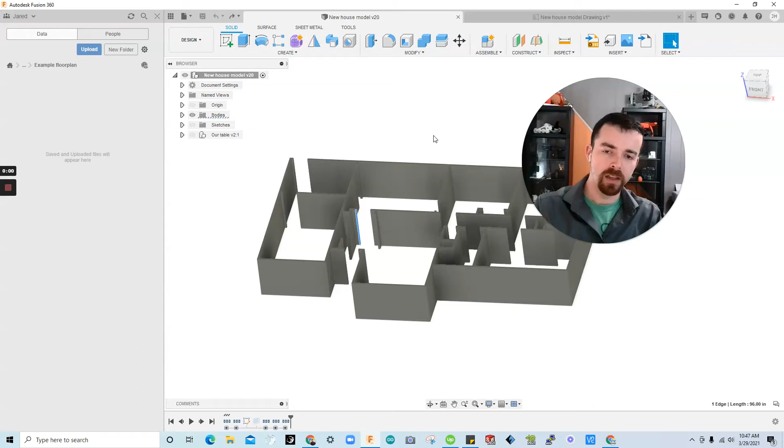Alright, good evening everyone. This video is simply to show you how to turn a hand sketch like this into a physical 3D model or 3D print.

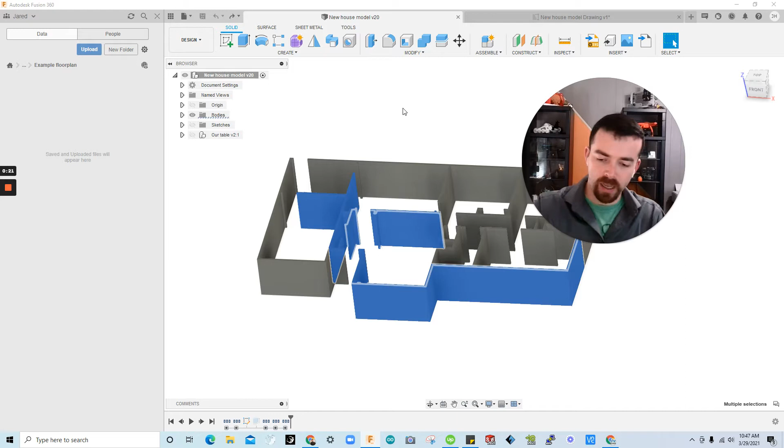Or if you want to just leave it on the computer, you can have the 3D model there, or throw it into a floor plan. I'm not going to do any advanced stuff, just the very simple stuff using only free software, and just beginner level walls, doors, and windows.

I'm going to go through this video in this order: how to produce a basic model drawing packet from a floor plan for free, and I'll show you where to get this software. Simple setup from sketch, then extrude basic walls and windows, export it to a drawing packet, and then I'll show you some additional options for sharing our plans with friends for free — appearances where you can paint the walls, add furniture and decor.

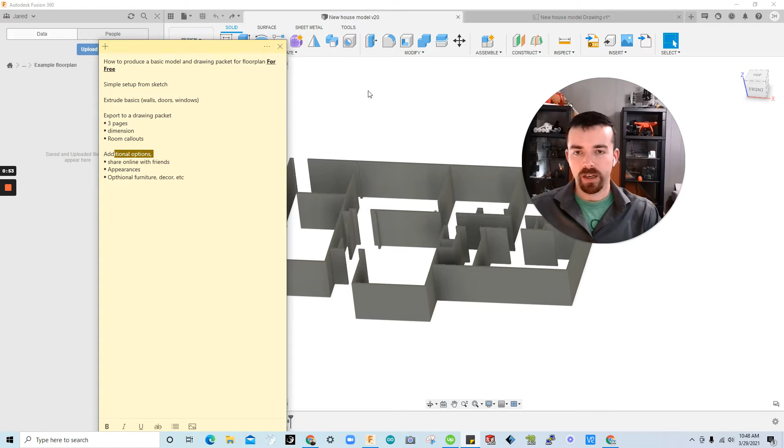So that's enough of that, let's jump into it. What I've done here is taken a picture of this simple hand sketch. I just threw this together in like a minute right before this video.

So we're going to get Fusion 360. If you don't have Fusion 360, it's free, don't worry. I'll show you where you can find that at autodesk.com/products/fusion-360/personal. Or just go to Google and type in Fusion 360 for personal use, scroll down, click Get Started, and run through those steps.

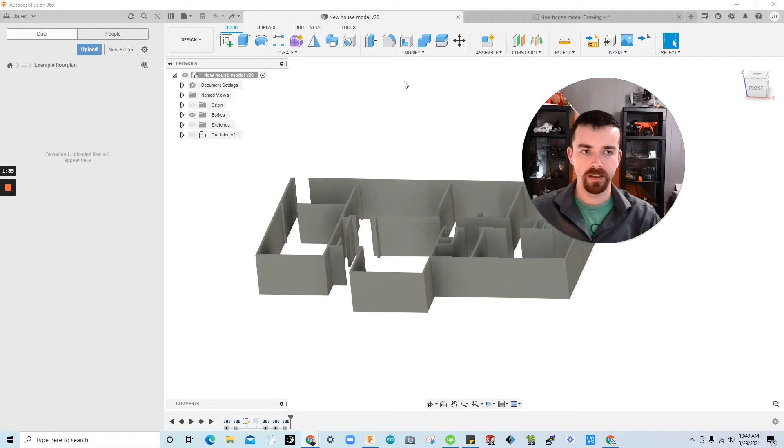Once you have that, you'll open it up and it'll look like this. We're going to start a new project — that's just a different one I was working on.

You'll need to take a picture with your iPhone or whatever and put a picture of this on your computer, because this is literally the simplest way I know how to do this.

So we'll go to Insert. Let me move this out of the way. We'll go to Insert here, go to Canvas, click Canvas, insert from my computer, find your image, and open it.

Sorry, my cat just jumped on the desk. Let me get him off.

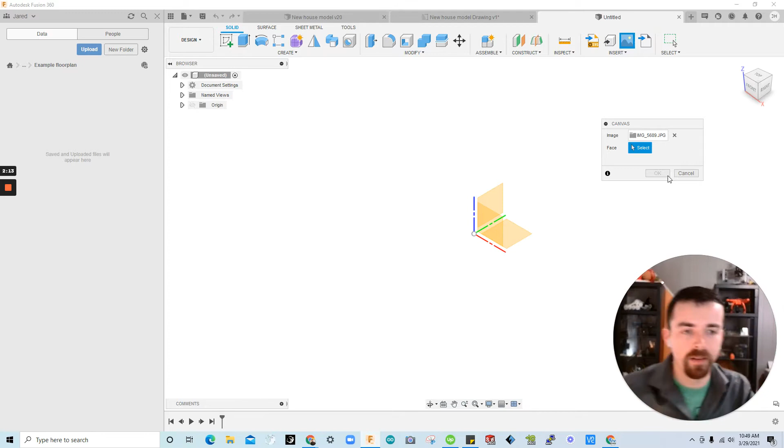Sorry, buddy. We're going to click on any of these faces, that'll be fine — our plane has the face here, so I'm going to click that. It'll ask me if I want to scale and whatnot, but let's keep this very simple, so on the confusing one, just click OK.

You can use the view cube to zoom in and zoom around, and also your scroll on your mouse, but I have a 3D mouse, so I'm going to move it around like this, just a heads up of why that looks different.

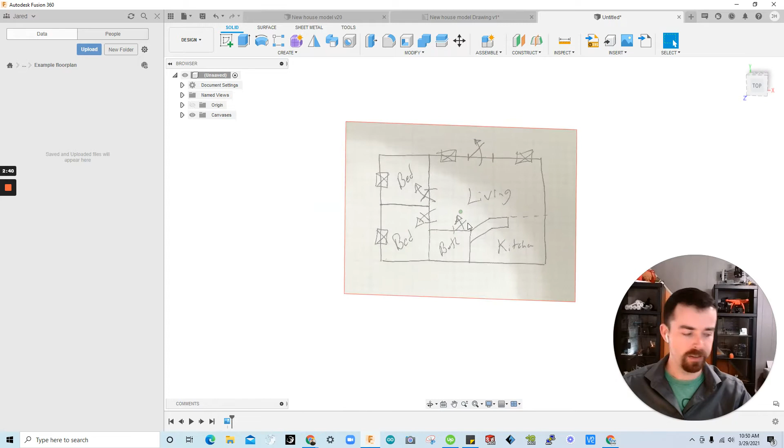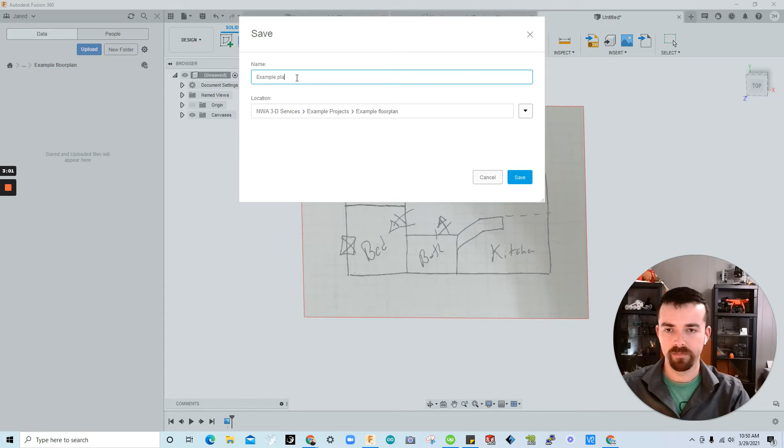So we're looking at the canvas here. You can see now we also have a canvas here, but we have unsaved, or we haven't saved our document, so I'm going to push Control S and name it example plan or floor plan — doesn't matter if it has a space in it, that doesn't matter.

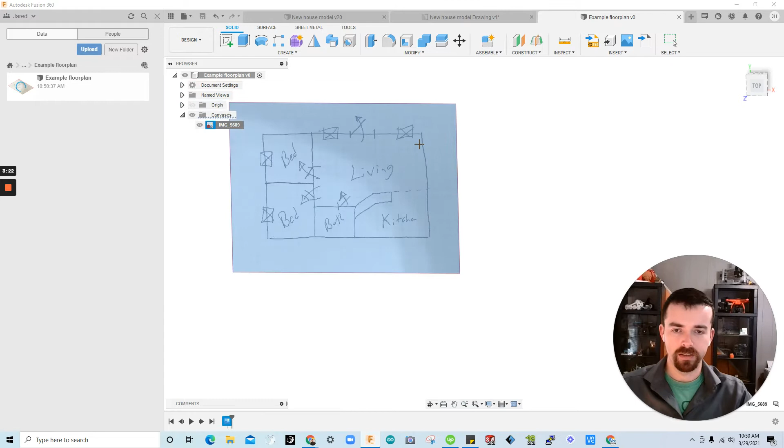Expand your canvas here, and then once you find the image, right click on that and scroll down to Calibrate. Once you've got Calibrate, go to the canvas and click between 2 points you know the distance of.

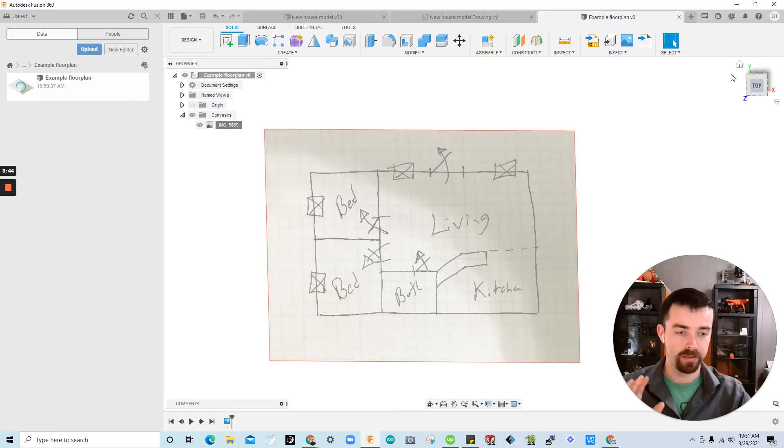And again, this is a hypothetical floor plan I just drew up real quick, so I'm going to say that is 40 feet. Click Enter. You're going to need to scroll way out, because as you see we just made that thing huge, and if it disappears, just click Home and it'll auto zoom you in.

So this will be relatively accurate. Now let's produce a 3D model — that's the first step, because then we'll have the model to drag into a drawing, and it's very simple.

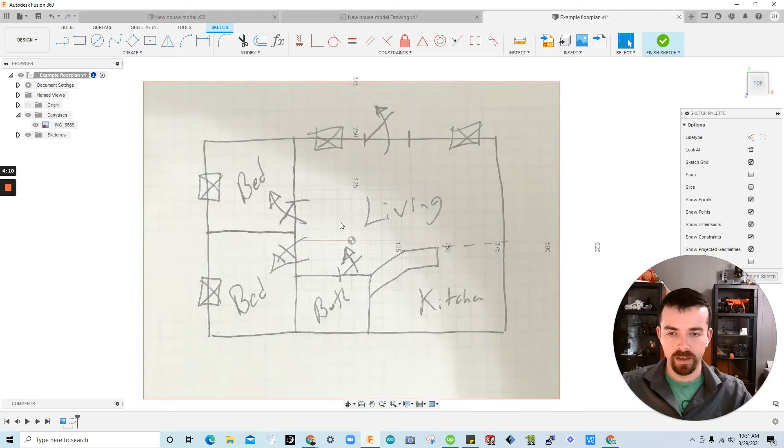So the first thing you'll need to do is click Create Sketch, click on the face there, that's the same one the canvas is on, and we're going to click on 2-point rectangle. Click on 2 corners of the house, and again, if you have multiple shapes, don't worry, we're just going to do a very basic version right now.

So rectangle — I'm not adding in dimensions at this point because this is a very simple video. I'm going to click Offset, click that rectangle, and you can see it's going to ask me for a dimension, and this will be our wall thickness.

And don't let this part lose you, because you don't need to do this, but it will save you a lot of headache. Go to Modify, Change Parameters, and then add these parameters in. These are the most basic ones, so use parameters, plus icon.

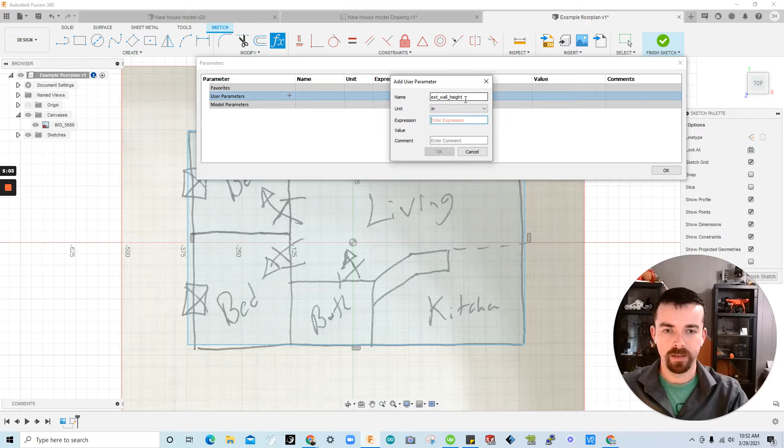We're going to call this one EXT for exterior wall height. Tab, tab — I'm going to say they are 8 feet tall. Tab, okay, add another one for interior wall height.

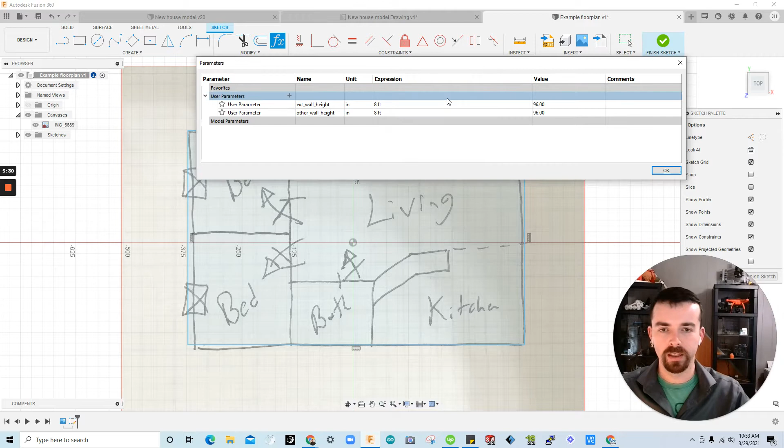Actually, you don't want to start something with IN because of inches. So let's start with other wall height as a parameter - tab, tab - and I'll make those 8 foot as well for simplicity. But the big one that'll save you a lot of energy is doors, windows, and walls. So let's do wall thickness, tab, tab, and I'll say they're all 4 inches.

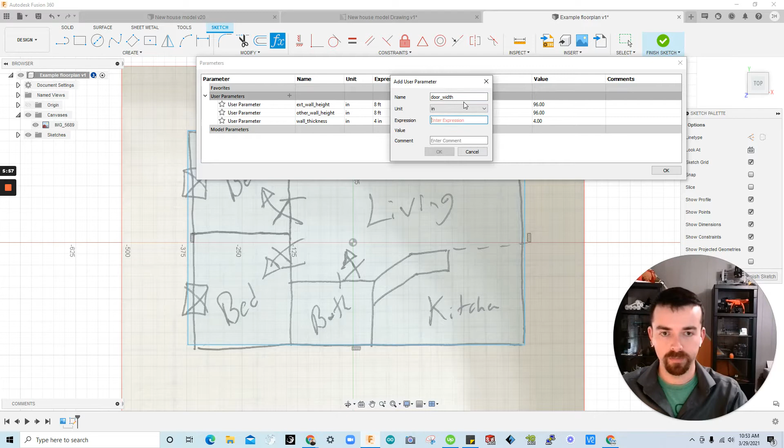Create another one - don't let this lose you. For door underscore D width, tab, I'll say they're all 36 inches. I clicked enter there twice because I didn't add anything for windows, but that'll be fine.

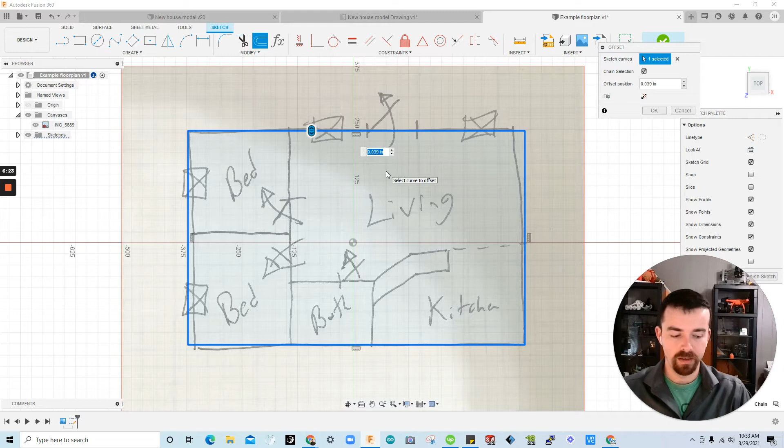Let's jump in - here's where that is very useful. If you click offset, or type O, I could click this rectangle. Now in the dimension here, I'm just going to type 4 inches, or IN, enter. You don't have to call out your units every time if your document settings have the right unit there. If not, adjust that to inches, which I'll show you. If they're in millimeters, meters, whatever, just click inch.

And mine are already at inches, so it's not letting me change. So that's where we're going to save a lot of time. Instead of saying 4 inches, we'll say wall, and you can see wall thickness popped up - that's our parameter that we just programmed. So enter, wall thickness, enter. Anytime in the future, I don't have to go back into the sketch to change that dimension, and we don't have to do it for all the walls, or keep adjusting them all.

We've got our exterior wall done. Now let's do our interior walls. I'm going to zoom in. You can see I'm just tracing the drawing, which is not very precise because I'm locking that line vertically, and you can see it's perpendicular.

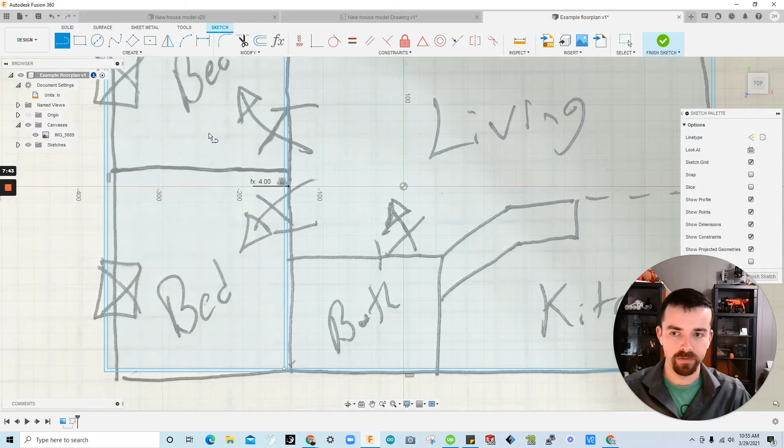I'm going to click O, or type O, or click offset there, and then wall thickness - you can see how that becomes very convenient. I'm going to type L for line, and just line this up about right there. That's fine.

Type O again for offset, and type wall thickness. Again, offset is up here and line is up there. But when I say type letter, it's a shortcut key.

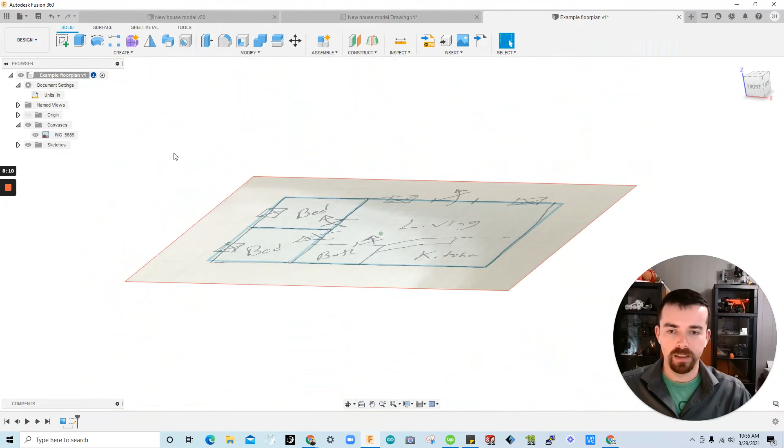All right, now we have the basics of what we need. I'll go ahead and show you what that would look like. If I zoom out, I'll turn my canvas off so you can't see it. Our goal here is just to extrude these out, clicking the spaces, and now we'd have a model.

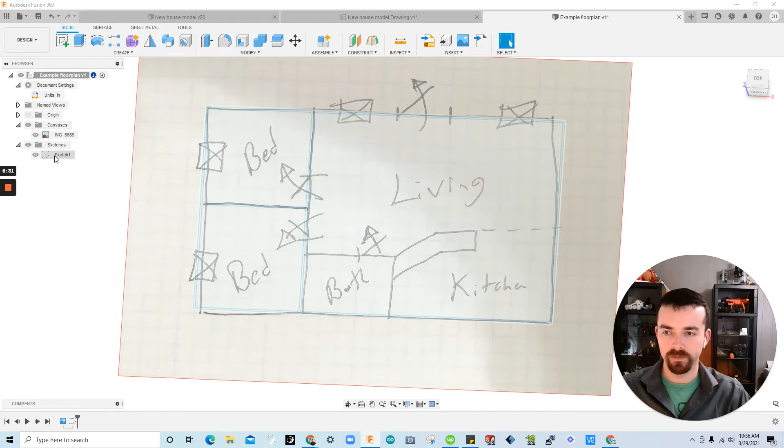But of course we want doors and windows at the very least, like I said. So we're going to go back, turn our canvas back on, go into sketches, find that sketch, double click it to edit. You could also right click on sketch and then do edit. All right, for doors and windows, let's try to keep it simple as well.

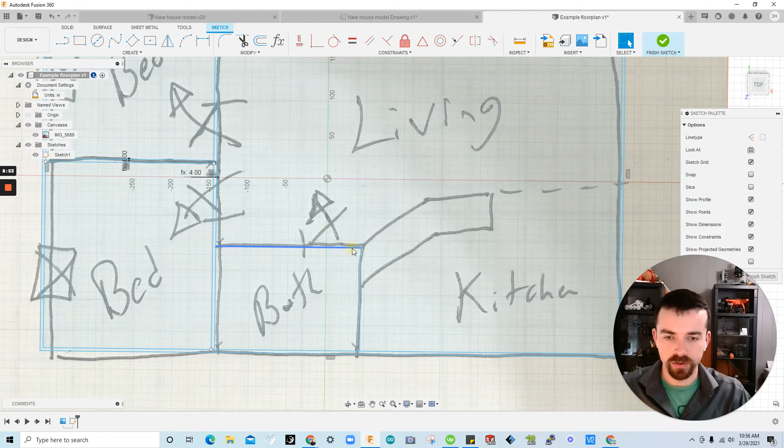Oop, we forgot the bath - let's do that last wall. I'll do a line here and then a line straight down, not worrying about dimensions right now. I'll then hold Control and click those two, and then click offset, set the thing as wall thickness again, and double enter. So we're good.

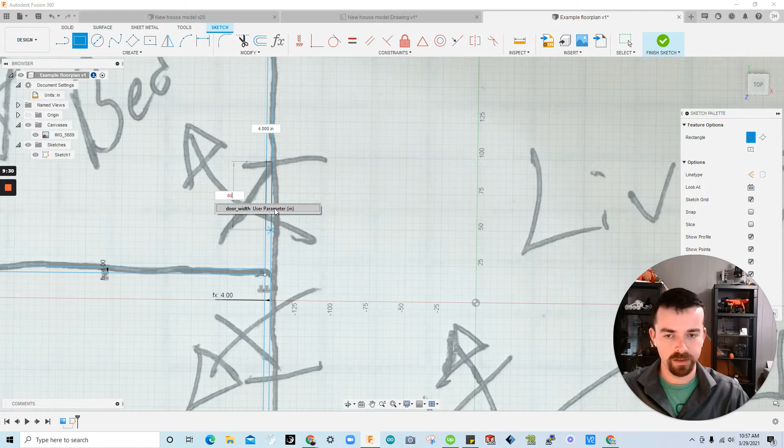All right, now we have all the walls. Let's go in and add some doors first. I'm just going to do all these with two-point rectangle, and you can see these arrows are doors, and it's auto-assigning to that line there, but we're going to type in door width, the parameter that we assigned a second ago. Enter, enter - you can see how that's convenient.

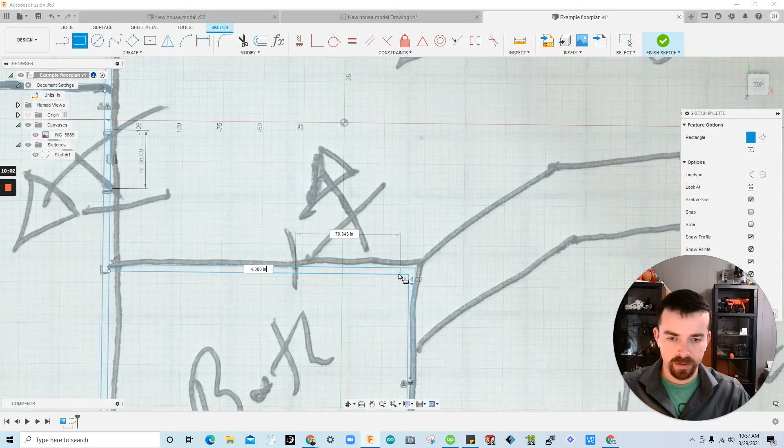I'm going to right click, repeat two-point rectangle. I forgot to type in door there, so I'm going to type D for dimension, click on the two door points, pull that out, and type door width. All right, escape to get out of dimension, go back up, two-point rectangle, door width. And this should be our last door. I'm not worried about where it's going, or being precise here. Okay, so we have all our doors.

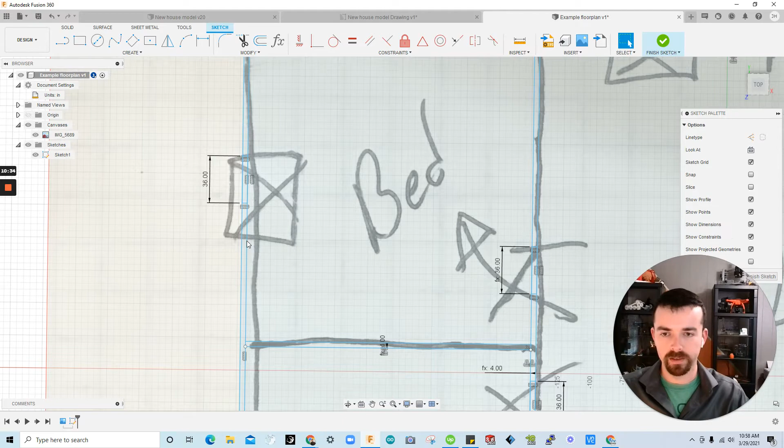Now let's do windows real quick. I didn't assign a parameter here, so I'm just going to say 24 for each one. Oh, that looks small, but I'll do 36 as well - there, that'll be fine. Repeat 2-point rectangle, 36 there, and our last two windows. Then we'll be done with sketching.

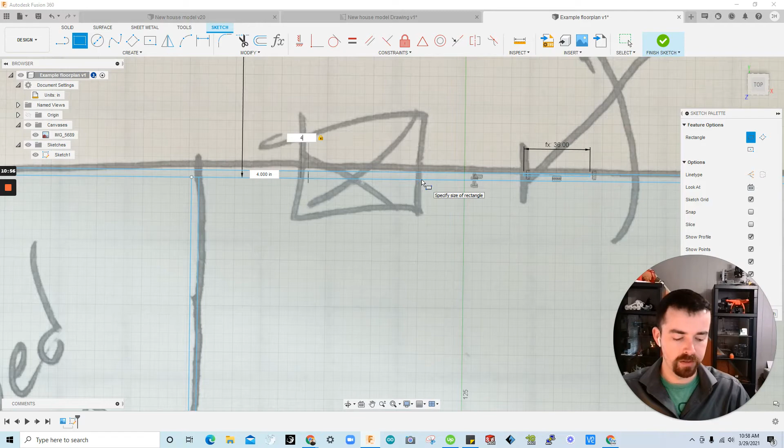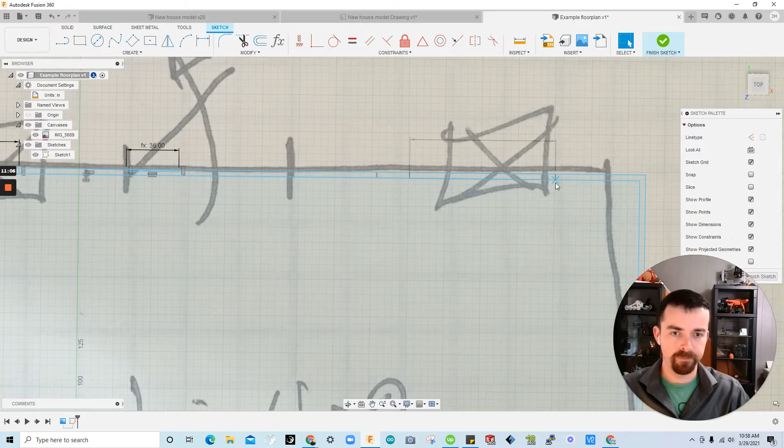You see how you can just do it all in one go. I'm going to call these 48-inch windows in the living room - be fancy. 2-point rectangle, again 48. All right, escape. Let's see, I think we're all done here. I don't want to confuse anyone, but let's add a counter just for fun, I guess. I drew this weird, but let's just go ahead and say that's what it really is.

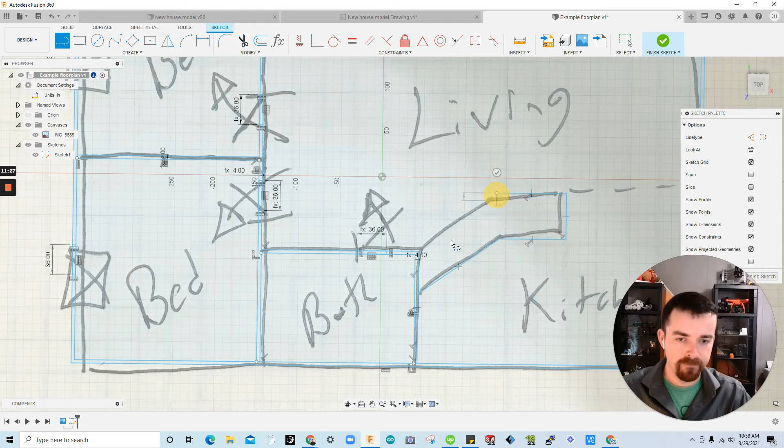Weird shape counter, there we go. Alright, this isn't a great sketch, it's just a very quick example. We'd obviously need to go back in and dimension a lot of stuff, but this will be fine for an example.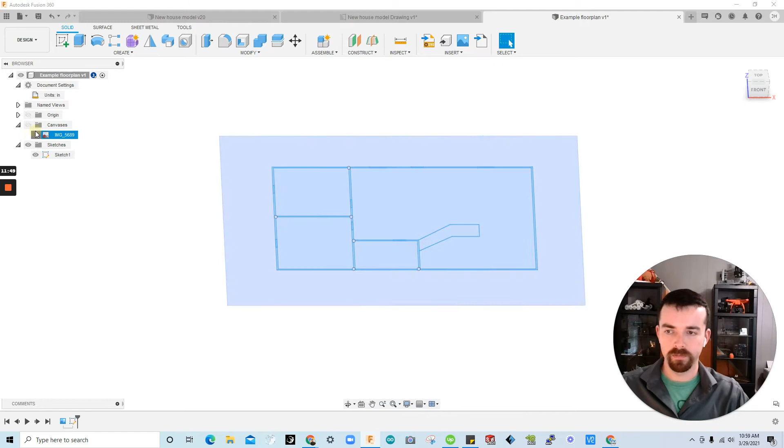So I'm going to click Finish Sketch, and turn off my canvas visibility here. You could also do it there, but I like to do the top level one. Okay, we still have our sketch visible. One thing I like to do is click on sketch, right click, and show dimension on all my sketches so I can see them for catching things in the future.

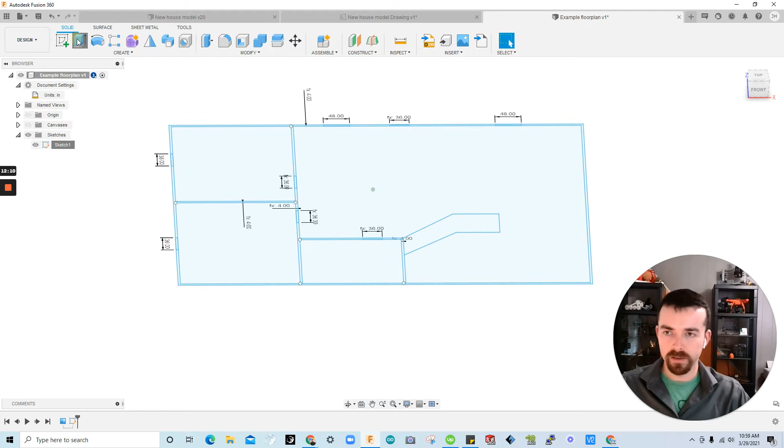Let's get going. I'm going to click Extrude, or type E. I'm going to zoom in and let's do the exterior walls first. We could do all the walls at once if they're the same height.

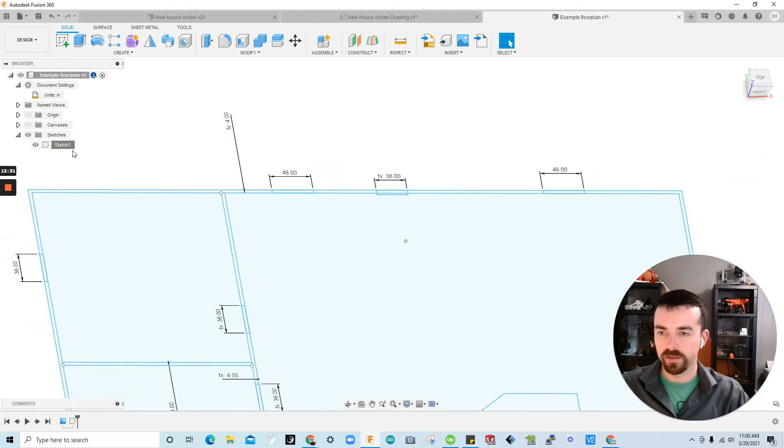Oh, you can see I messed up that thing there actually. Let's see if we can drag it. Yep, it's going to let us drag it, but it won't let us constrain it. That's alright, so I need to edit that - I go back to Sketch, double click Sketch, jump in.

See how this line isn't exactly lined up? I'm going to click that line and this line while holding Control. So Control those two lines, and then assign a constraint for collinear. Now you can see it's all good and set up. Finish Sketch, sorry about that.

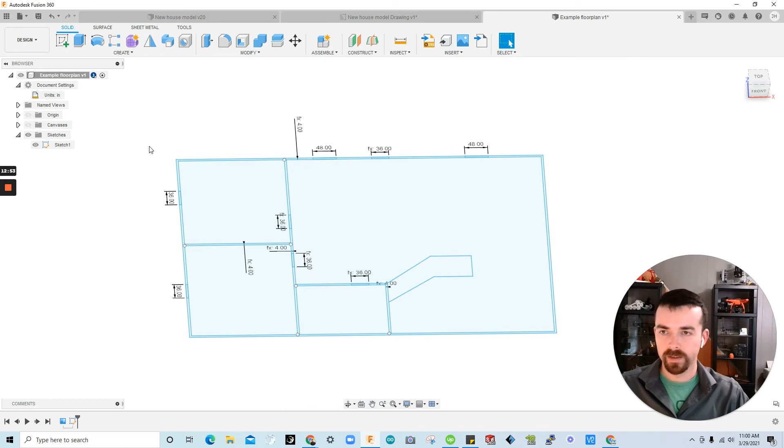I'm going to type E for Extrude and go back in and select all of our exterior walls. For this example, I'm going to include the windows - I'll show you why in a minute - but don't include doors. So include windows, but not doors for exterior walls.

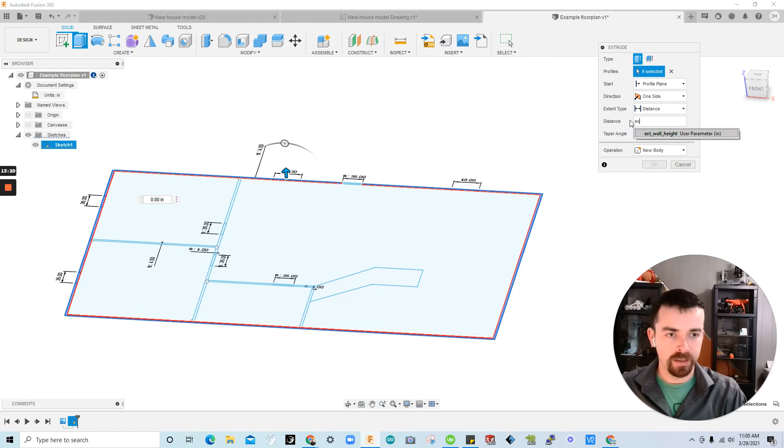So we're all done there. You can see we got profiles picked, and for distance, let's type 'exterior' and it'll pop up exterior wall height. So okay, and we have a wall here.

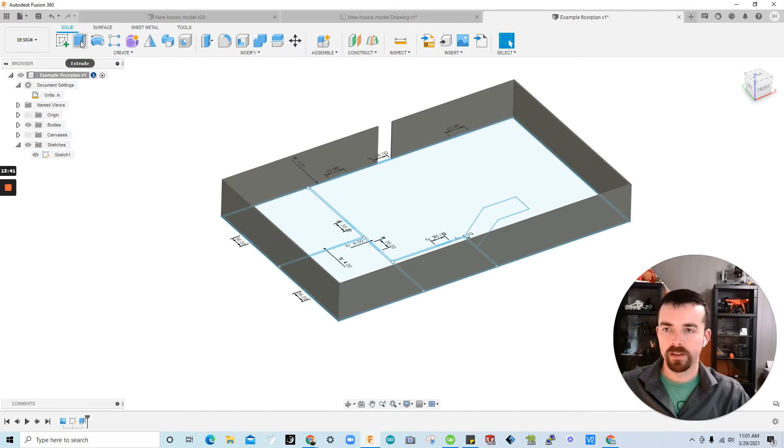And let's go ahead and do windows. You can see that's our extrude here. Let's turn our sketch visibility back on. Click Extrude again, go back in and select the windows.

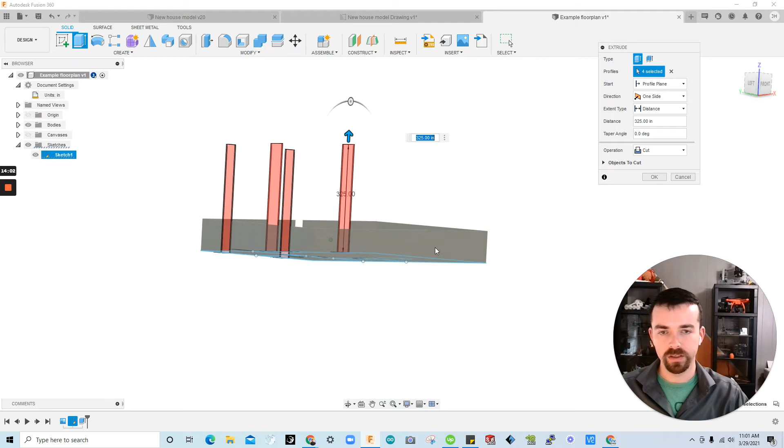But obviously, which I'll go up here in operation, I'll do a cut. And obviously I wouldn't want to cut all the way through because windows don't go top to bottom, of course. So what we'll need to do is go to Start, Offset. And for the offset, let's say your windows are 20 inches off the floor.

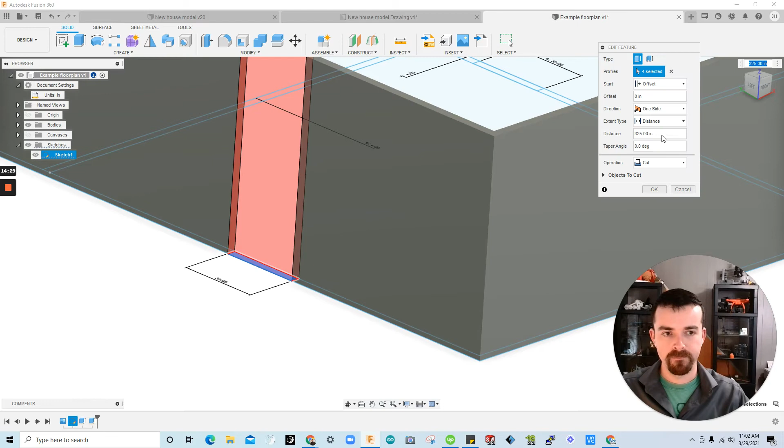As you can see now, we've added some offset between the floor and the beginning of the window cut. If you didn't see that, I'll show you real quick - so now it's cut all the way through. But if I add that offset of 20 inches, it's now off the floor. But we also don't want to cut all the way through, of course.

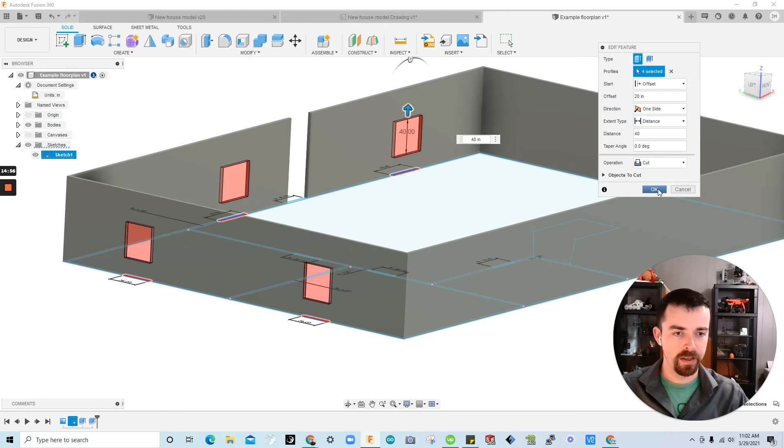We want it to look something more along these lines, and that - we can see it's 60 inches. Let's say that's close. Let's go to extent type, distance, and I'm going to say they're 40 inches actually. Doesn't really matter, again that's just an example, so it looks weird, but fine.

Okay, so now we have windows. That's great. Now let's finish out the interior walls and we'll throw it into a drawing.

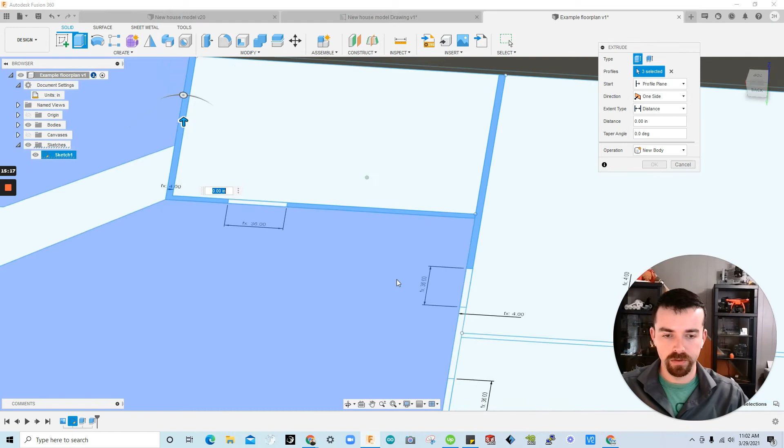So I'm going to click Extrude again, or type E. I'm going to go in and click all the interior walls except for the doors, because I don't want those in for the drawing. You can see we've set up the basic of the walls.

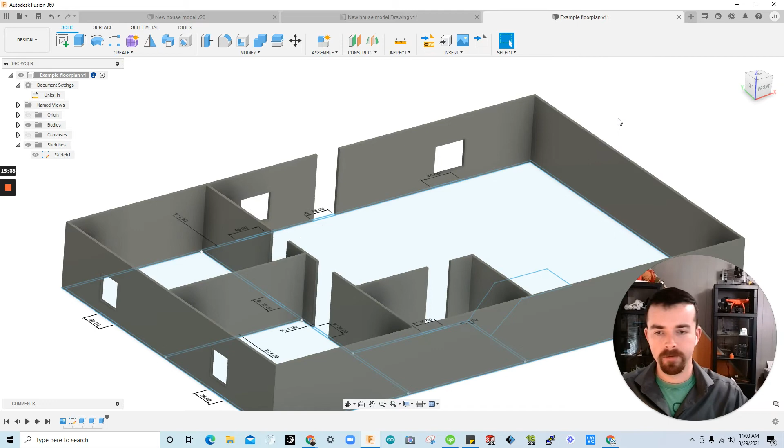I could pull them up, but let's just go to distance. We do want distance, and we want it to be our parameter, which is other wall height. Alright, so now we have a pretty okay little model here.

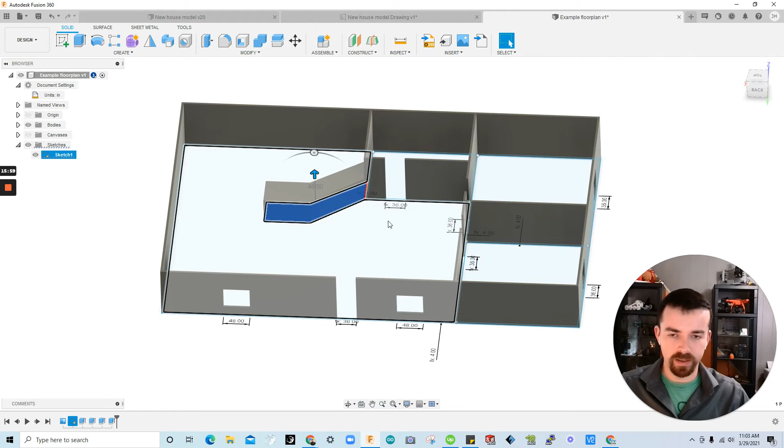This will work well on a drawing, and let's say we maybe wanted this counter weird shape to be there, so I'll pull it up to whatever my counter height was. Let's say 36 inches - that seems wrong. Let's say, I'll put this semi-close, 48 inches on. Enter. Okay, so now you have a countertop there.

Now we're going to save again. Control save, the newest version we just edited. And we'll go to File, New Drawing, From Design.

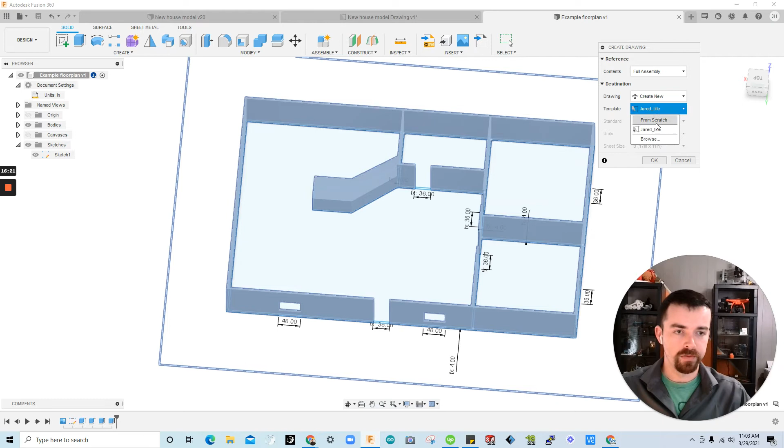And if you have a template, you can use it, but most people don't, which is fine - you can just do from scratch. So I'm going to go My Template, Create New.

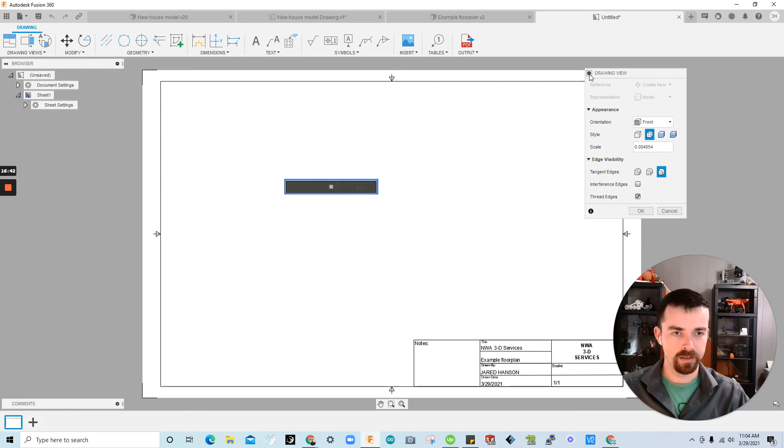It will take a second, but once it loads, you can see I have the model attached to my cursor. I'm going to click there, and go over to the drawing view. If it looks like this, just click that plus icon. Let's see if we can find a good orientation - so I like that one, top.

Yep, that'll be fine. And then we'll do a scale. So typically these will work with like a 1 to 100 scale, but let's do 1 to 120 or 1 to 80. Yeah, that was good. Okay. And we're going to show hidden edges, and I'll show you why in a second. You could click shaded or show hidden edges, or however you want. Shaded with hidden edges, sure, let's do that.

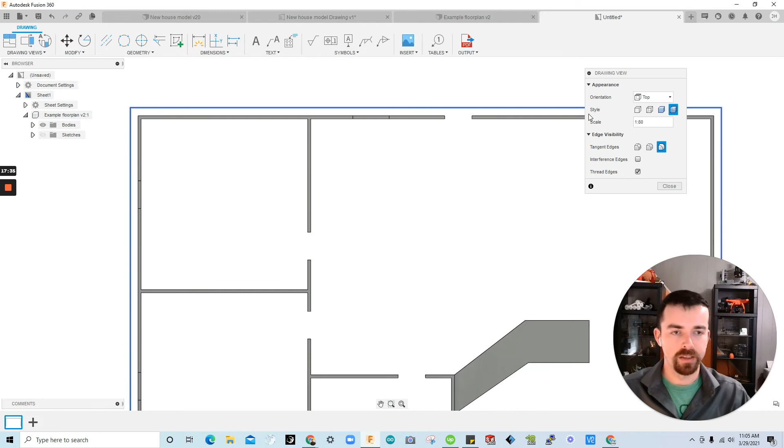Okay, so now we have our model shown here, and the perspective makes it look like a floor plan, which is great, and it's just an easy way to do this. So these lines here indicate the window, and that's because if I double click and bring that drawing view box back up, you see I allowed it to show hidden edges, but if I turn that off, you can see they go away. But it's nice to be able to know where the windows are, so I always do with hidden edges, or like this, which some people like.

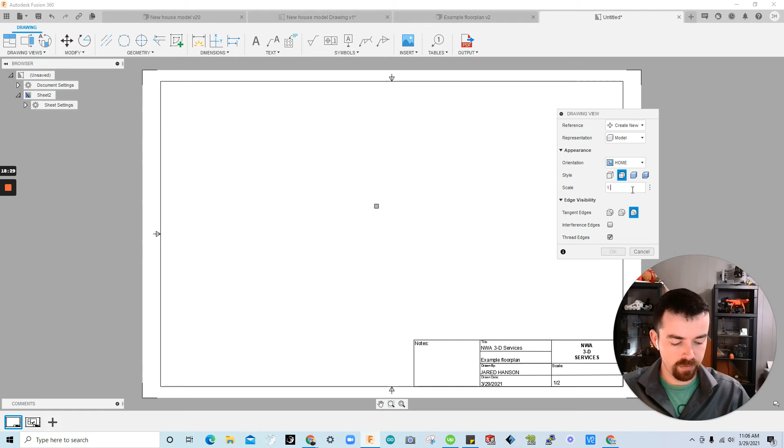Alright, looks fine. So let's do just a simple 3-page one. I'm going to go over here and click Add and drag this page to the front. See how I just swapped them? So that I can do, I guess, a nicer view for the front page. So I'm going to do base view, or drawing views. Drop that view in, and let's say home. And then we'll format the size to 1 to 80 again. That looks about right. And I'm going to double click it again because I want to change this one to shaded since we can see where the windows are.

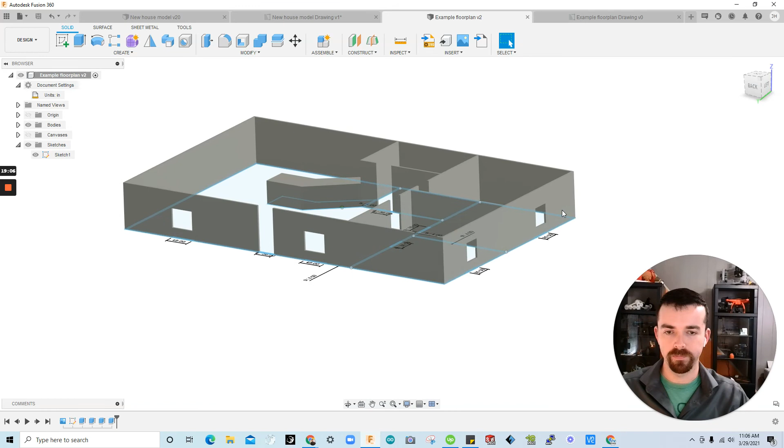Now, if you'd like your front door to be facing towards you, which is just habit for me, I'll run back to the example floor plan. First, it's good practice to always push Control Save while we're still in the drawing. I'm going to jump back to the floor plan model. I'm going to situate it however you want, using your view cube, maybe like that. Doesn't matter too much. Then I'll go back up to the view cube, the down arrow, set current view as home, and just fit to view. Then I'll push Control Save to update it.

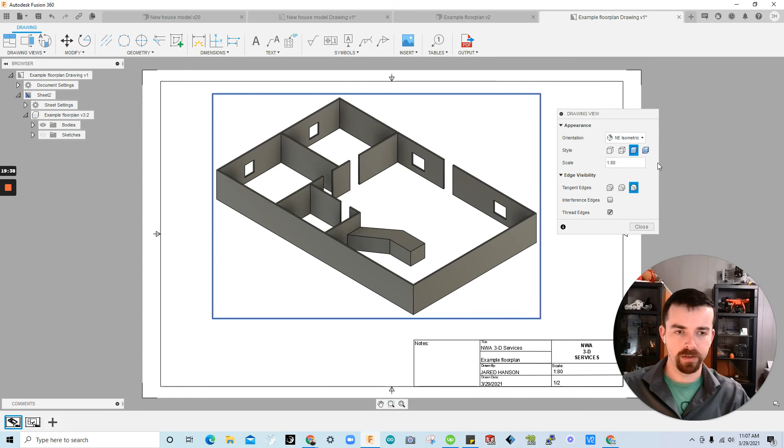Jump back to my drawing, and as you can see, we've got a reference update needed with the icon on there, so I'm going to go ahead and click it, and it will update this. Should. Let's see if it changed. I'm going to double click. Okay, it didn't. And then do home and see if it updated the home view. Okay, I can see it's in the perspective that I moved the model in a second ago. So close. That's typically just an okay thing for the front view. Again, this is a very basic model, but it serves a purpose.

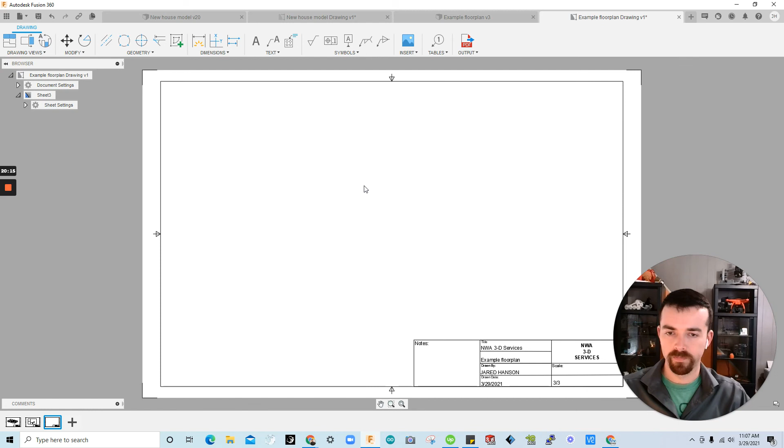And then typically I'll add another page just like this one. So I'll just do that page and delete you. Oh no. Okay, I was thinking SolidWorks for duplicating. No worries, just click the plus, add, drawing views, base view, click on it, do top again, shaded with hidden edges, scale is 1 to 80. Okay. And we've pretty much got everything we need here.

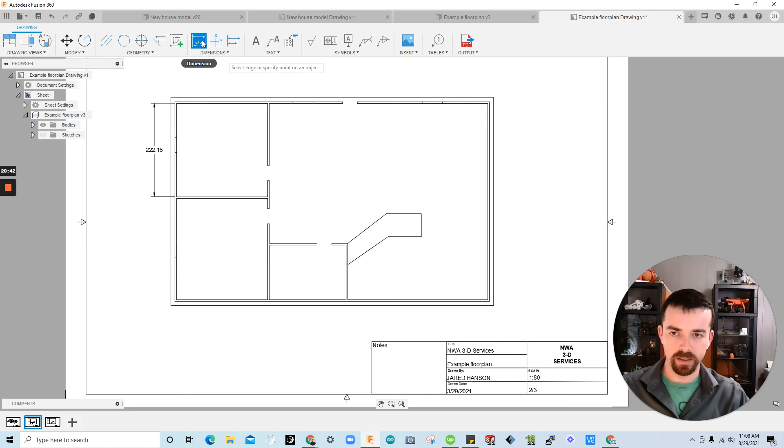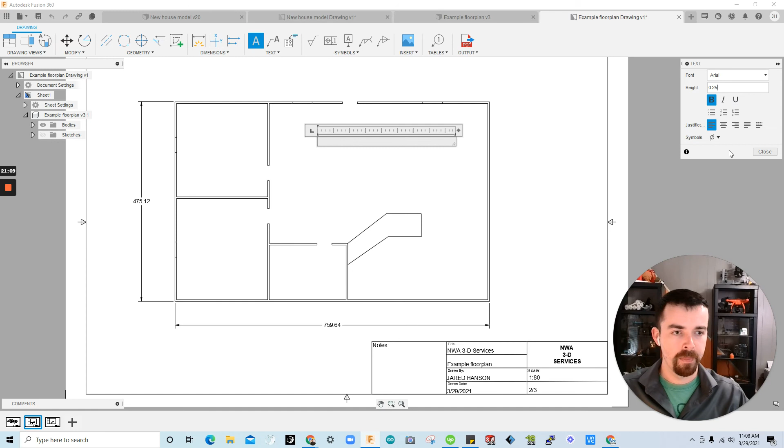How do you add dimensions and notes? That's about all that I'll cover for now. Keep this simple. So you could still type D for dimension and do it that way, or you can go up here and click dimension. But typically, one good thing for these, let me delete this one, is one page with the exterior basic dimensions on there. So this is a simple box, so maybe something like this with the basic dimensions, and then some annotation. I'll just do one, I'll put it in bold, and the height of the letter is 0.25. And then I'm gonna type living room. So put that title wherever you want, and you can put one in bedroom.

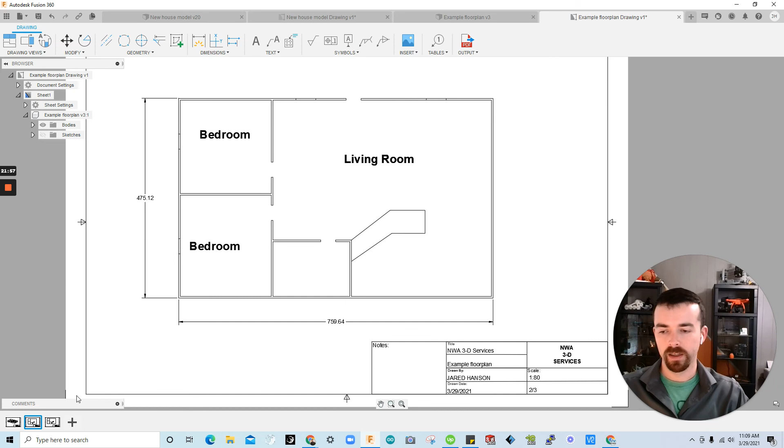Once you have one, you can click on it, Control C, click somewhere else, Control V, and drag it over there. Control V, enter, grab a point, enter, and then you can edit these so you don't have to do the text every time. So bedroom, enter, bedroom, and just repeat for bathroom, kitchen, etc. And the next page you could go more in detail where maybe you want the interior dimensions called out, and you could even put them on the interior if you want, to signify that.

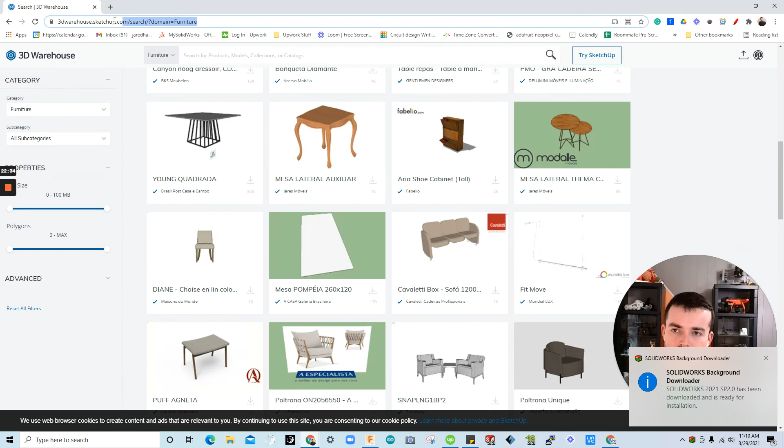Let's see if we can do one or two more. Yeah, so basic stuff like this. That's all good, and that's about all we need to cover. So I showed you where to get Fusion. Now last, some optional things that I'm not gonna do on the video, but I'll show you where to get them. You could add in furniture items from free sites such as 3D Warehouse, and I believe I have another video on that, but you can directly use those. Or sites such as GrabCAD, where if you set up an account, you can download free files and just drag them into your model, and I'll make another video on how to scale things and line stuff up. But this is the quick and dirty version of how to do this.